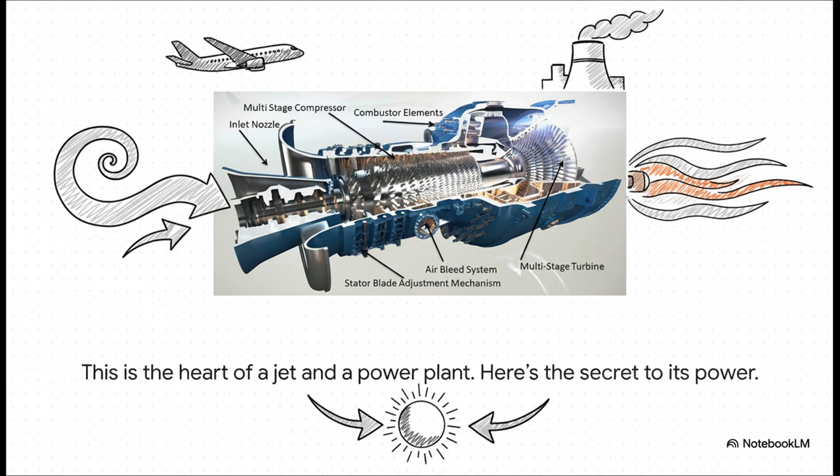Just look at this thing. It's incredible. This machine right here is the core of both a jet engine and a massive power station. And the secret to its insane power, well, it's basically the same for both. We're about to follow the journey of a little bit of air as it goes right through the heart of this beast. You're going to see how it's done.

All right, so this whole incredibly complex process, it really just boils down to 4 simple, powerful words: suck, squeeze, bang, and blow. Now, engineers call this the Brayton cycle, but this is all you need to remember. It's our roadmap. The engine sucks in a massive amount of air, squeezes it like you wouldn't believe, ignites it in a controlled explosion, and then blows that hot gas out to create power. So, let's follow the air.

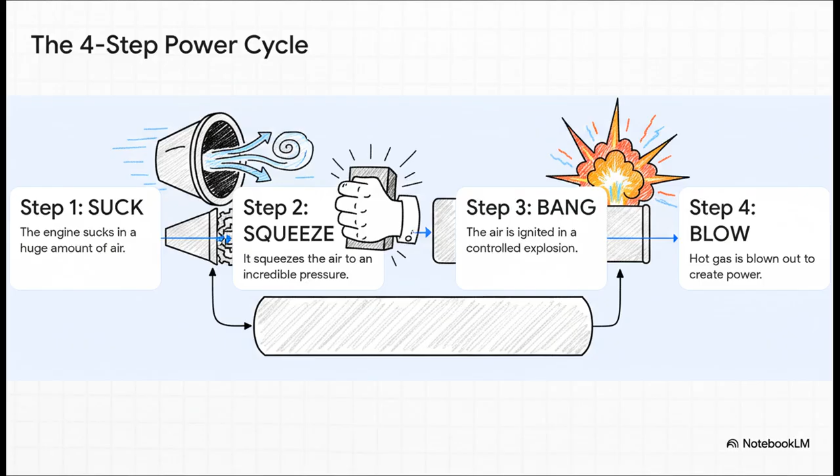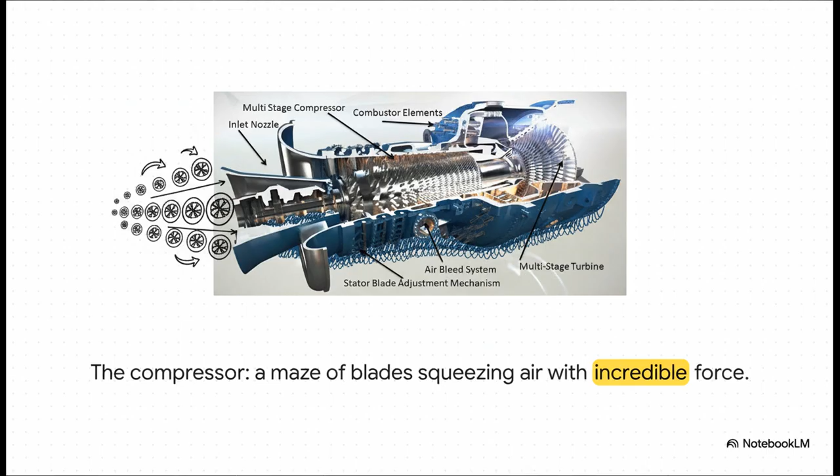First up is the squeeze. And believe me, this isn't just one simple step. It's probably the most critical, most energy-hungry part of the whole deal. This is where the real work of the engine actually begins. Now, check this out. See this section right here? This maze of blades? That's the compressor. It's basically a series of thousands of tiny, super strong wings, all lined up in rows. Each row gives the air a little squeeze, then passes it to the next row, which is a little smaller, and squeezes it even harder, and on it goes.

And what's the result of all that squeezing? Well, the pressure of the air can get jacked up by a factor of 40, sometimes even more. I mean, think about that. The air coming out of that compressor is 40 times denser than the air that went in. That is just a massive amount of potential energy, all stored up in the form of pressure. Getting this squeeze part right was the absolute key to making gas turbines work. Early attempts, they failed right here. The turbines they built just couldn't produce enough power to run their own compressors. It just goes to show you how vital and how incredibly difficult this first step really is.

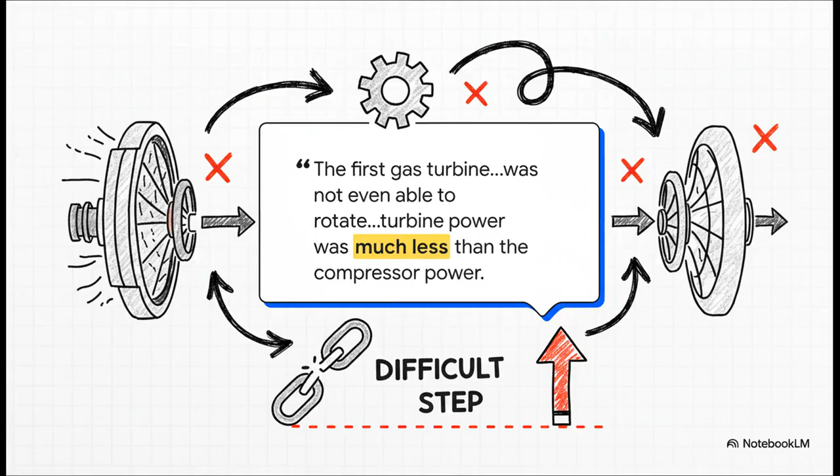Okay, so now we have this incredibly pressurized air. It's just sitting there, ready to go. So what's next? It's time for the bang. Let's head over to the combustor and see how we light the fuse. So the combustor is where we turn all that pressure into raw heat and power. And it's not like one big kaboom. No, think of it more like a perfectly engineered continuous blowtorch. Fuel gets sprayed into that super pressurized air and lit, creating this sustained roaring fire that's carefully managed to make a non-stop flow of extremely hot, high-pressure gas.

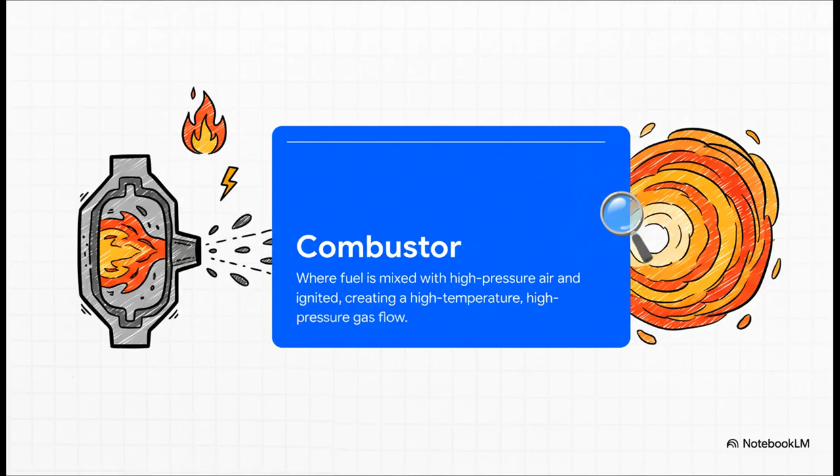So we've just created an absolute hurricane of hot gas. Now what? Well, you can't just let all that energy go to waste, right? We need to harvest it, and that is the job of the power turbine. This is the blow stage of our cycle. And this is probably the most mind-blowing fact about the whole thing. As that hurricane of gas blasts through the turbine, it generates a colossal amount of power. But get this, a full 2/3 of that power is used for just one thing: spinning the compressor back at the front of the engine. The engine uses most of its own power just to keep itself going. Only that last 1/3 is the usable power that actually pushes a jet forward or makes electricity for your home.

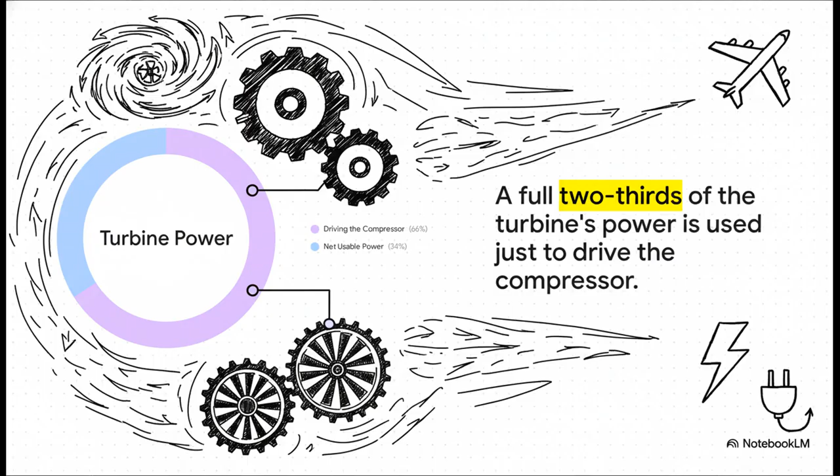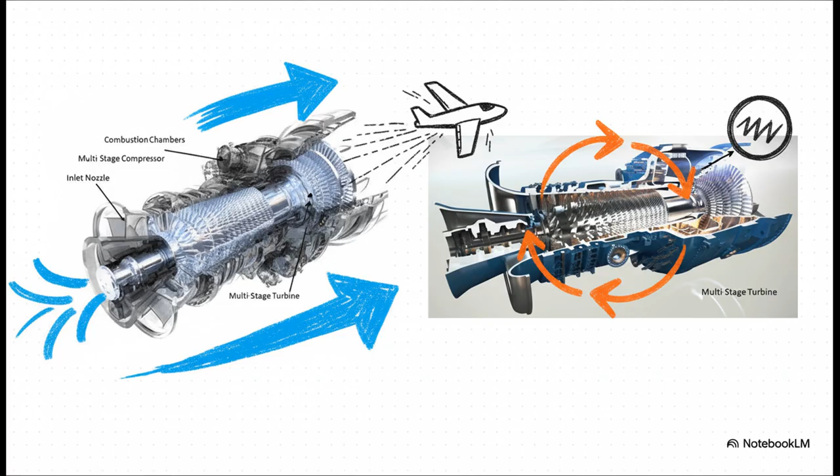So how does that final 1/3 of power actually get used? Well, this is where our one machine splits off to do 2 totally different but equally vital jobs, all using that same core principle. Okay, so look here. On the left, you've got your jet engine. Its whole purpose in life is maximum thrust. That blow phase is funneled right out the back through a nozzle, pushing the plane forward. Simple. But over on the right, in a power turbine, the goal is totally different. It's designed to capture as much of that energy as possible. It uses extra sets of turbine blades to turn all that hot gas into rotational power, spinning a big shaft that's hooked up to an electrical generator.

As we wrap this up, it's so important to see this machine not just as a few simple steps, but as this breathtaking engineering balancing act. It's constantly running at the absolute edge of what our materials can even handle. So what's the ultimate challenge for the people who design these things? Well, it's managing a whole set of extreme and often conflicting forces, all at once, inside a machine that's spinning tens of thousands of times a minute.

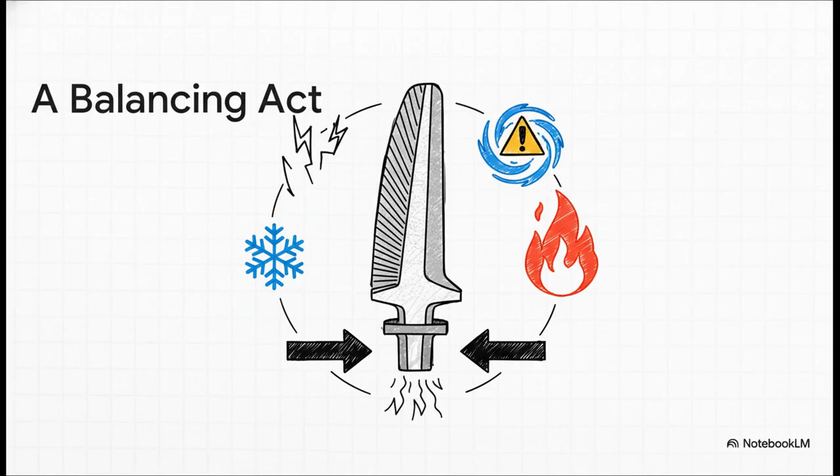I mean, they're juggling parts so hot they would literally melt if not for these crazy complex cooling channels built right into the metal. They're trying to manage airflow that moves faster than the speed of sound, creating shock waves inside the engine. They have to deal with immense physical stresses, stop destructive vibrations before they start, and squeeze out every last drop of efficiency, all while avoiding things like surge or stall, which are basically aerodynamic hiccups that can destroy an engine in a split second.

So the next time you flip a light switch or see a plane streaking across the sky, just remember this hidden giant. It really is a testament to human ingenuity, a symphony of thousands of parts, all spinning together in this perfect, violent harmony. It's a reminder that sometimes the most powerful forces that shape our world are the ones we never even see.